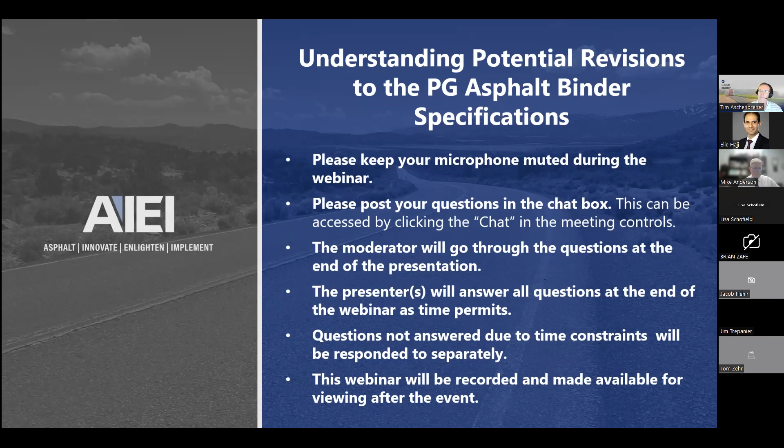Okay, thanks, Tim. Hopefully everybody can see the screen and can hear me okay. Yes, so I can see the screen and hear. Very good. Great.

As Tim mentioned, this presentation is about understanding potential revisions to the PG Asphalt Binder Specifications. This comes from some relatively recent research completed through the National Cooperative Highway Research Program, looking at binders, specifically intermediate temperature cracking and some issues with how that works within the binder specification, and what some recommended changes are. We'll talk a little bit about that. There's also a project that discusses binder aging and how that relates to mixture aging and what we see in the field. So we'll touch on that. I think we'll have some time in order to touch on those.

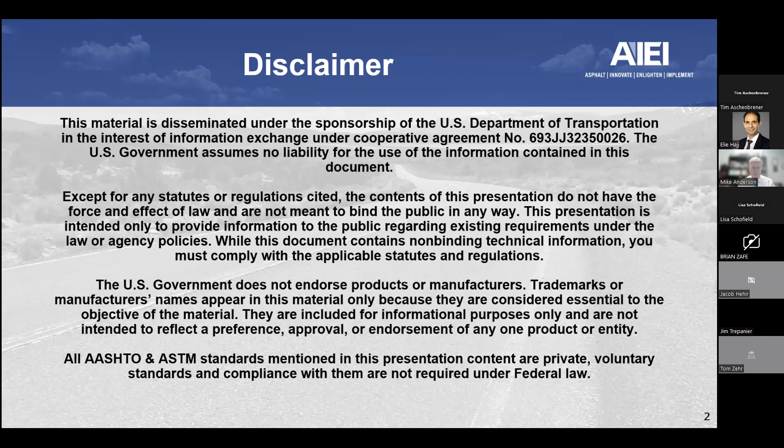Tim's gone through the introductory part. I will post the disclaimer. I'm not going to read all that for you, but just the standard disclaimers, that it's a cooperative agreement with Federal Highway Administration. The U.S. government doesn't endorse products or manufacturers. And if we're referencing AASHTO and ASTM standards, understand that those are private voluntary standards, and compliance with them is not required under federal law. I think the rest of it should be pretty straightforward, but it's there if you want to read through that.

First things first, really, as Tim mentioned, this is an implementation project. It was actually born of some work we did for the National Cooperative Highway Research Program that was also considered an implementation project. It goes by the number 20-44 PRIN 19, which is not a really convenient number, but the 20 series of numbers in NCHRP are kind of like special projects, and the PRIN 19 part means it started in 2019. So thanks to that project and the panel and the program officers for their input on that.

Also, really, because what we're doing is talking about implementation, this isn't research that we did, or that the University of Nevada, Reno did, or even our team members did, I don't think. So it's really just reporting on what those results were and trying to understand how they fit together with any potential changes we might be looking at in the PG binder specifications. We really couldn't do this without the research teams, is what I'm getting at. So thanks to those folks, the research teams for 959, 960, and 961. I'll talk a little bit about who those folks are. Thanks, of course, to this cooperative agreement that is looking at how we deploy these technologies. And last but not least, certainly in my case, thanks to our member companies of the Asphalt Institute who make it possible for me to do work like this.

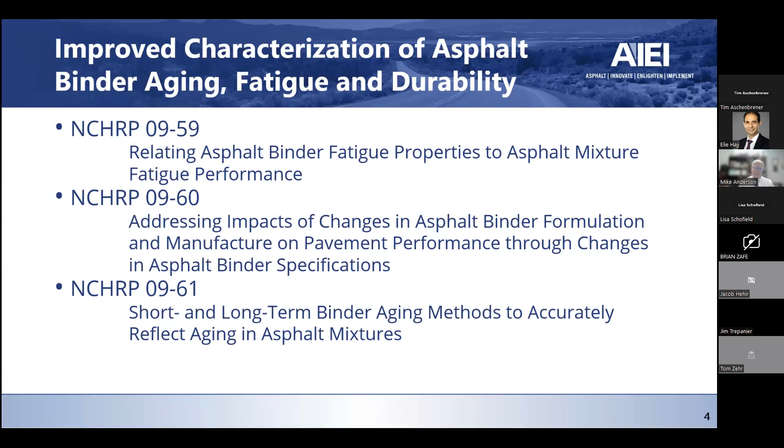Before we get into those projects, I want to step back briefly and cover some basics. This is important to set the stage for why we're doing some of these things, what they mean, and how they influence the performance we see on the road. Specifically, how are asphalt pavements affected by temperature and traffic loading? How does aging affect asphalt pavements? What distresses are we trying to minimize? And what do we want from an asphalt binder specification?

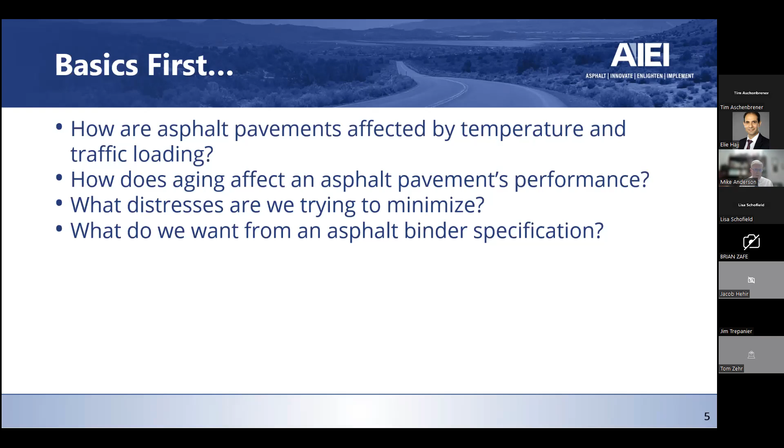These were all questions asked during the Strategic Highway Research Program as they were developing the PG Asphalt Binder Specification. And it's really the same questions we ask today: how do we establish a specification that addresses the distresses we want to look at for asphalt pavements? So I'll touch on some of this, and admittedly some of it is a little basic for some of you, but it's a good review.

First, in high temperature behavior - this slide was first developed by Bob McGennis back when we were doing training with the Federal Highway Administration after SHRP ended, about 1994, 1995. We had these classes and we talked about rutting and depressions in an asphalt mixture.

And we said, well, it depends on the asphalt binder, the mineral aggregate, and volumetric proportioning - you see that sum in parentheses. What that means is that each of those has some role to play in what happens with rutting in a pavement. We're talking about material rutting, not subgrade rutting or anything along those lines, which we don't control. From an asphalt mixture standpoint, the asphalt binder has a role to play, the aggregate has a role to play, and the volumetric proportioning has a role to play.

And we say that because it's important that you don't just rely on one of those factors to try and control your rutting. In other words, if I have a really good binder and I put it together with rounded aggregates and lots of natural sand, and I'm putting it out on a high traffic volume roadway, it's probably not going to perform all that well, even though I've got a really good binder. By the converse, if I've got really good aggregates and a really strong aggregate structure, but I use too soft of a binder, it may not perform very well.

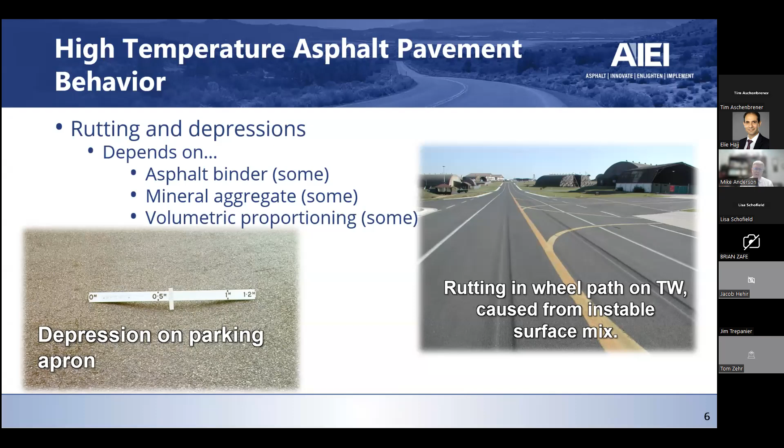And for volumetrics, what that basically means is what happens if I add too much asphalt to my mix? If I just pour asphalt into there, it's going to have bleeding and potentially rutting, regardless of the aggregate and the binder. So all those things kind of play a role. And that happens a lot with our distresses that we're interested in, which is important to think about as you're establishing a specification.

As far as low temperature cracking goes and low temperature asphalt pavement behavior, what we're interested in is cracking. That's a case where if the temperature of the mix is dropping, you get internal stresses that develop in the mix caused by this temperature drop. If your binder is too brittle or too stiff for that environment, then it can't relax the stress quickly enough and a crack develops. That happens as soon as the stresses exceed the strength overall, and you tend to get the transverse full-width type of cracking.

Now, in this kind of distress, it depends very much on the asphalt binder itself and not as much on the other factors - a little bit on volumetric proportioning, but not as much on mineral aggregate. The reason for that is the asphalt is the glue, and that's the part that's really temperature sensitive.

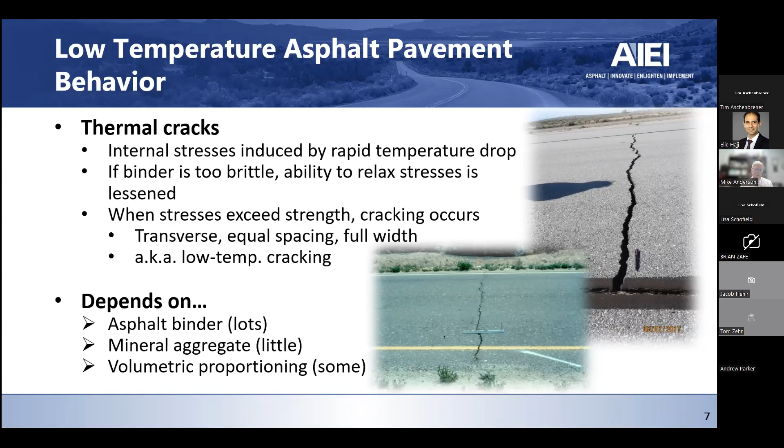When it changes temperature, that's the part that's shrinking. Even though you've got two rocks stuck together with glue in between them, as the temperature drops, the rocks don't change with temperature, but the glue does. And when it shrinks, that's where your stresses build up. So it really depends very much on the asphalt binder itself.

The other piece we look at is durability cracking and what happens as an asphalt binder ages. You've heard people talk about fatigue cracking. That's the type of cracking we get from loading, repeated loading. As cars and trucks pass over a pavement, it flexes, it relaxes.

The example I like to use when giving tours in our laboratory is that it's a lot like bending a paper clip. I don't know if you've ever done this, but I have. Just when you're bored, you've got a paper clip, you straighten it out, and you kind of bend it back and forth. Well, eventually it's going to break, but how quickly? It depends on how much I'm bending it back and forth.

If I'm just bending it a little bit back and forth, it's probably going to last for a while. If I'm making big movements, it's probably going to break relatively quickly. And it's going to depend upon the paper clip strength itself. If I've got a cheap paper clip, maybe it's going to break a little bit earlier than one that's a little bit better quality, made from better quality material. So those are what we look at for fatigue cracking.

With aging, what happens is an asphalt pavement oxidizes, and it's a hydrocarbon, and it's like any of the rest of us. We age and we oxidize and we get stiffer and we become more brittle. And that's what happens with a mixture as well. We tend to see that in random wandering cracking.

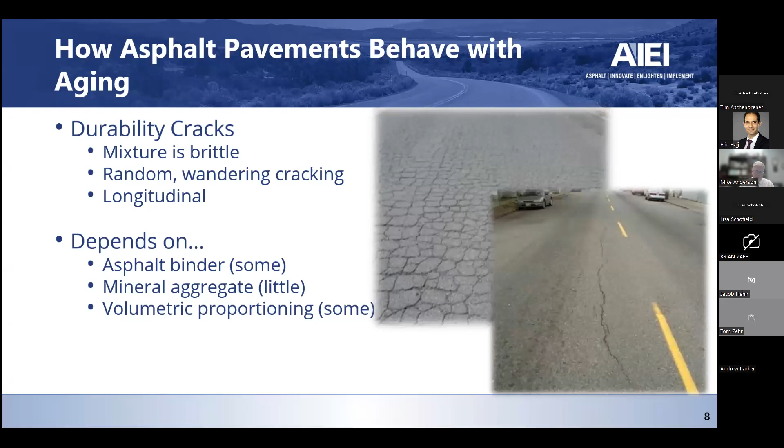Now, there's a model that Matt Witczak and Dr. Mirza put together. This was back in 1995. That was a global aging model, and this excerpt is from their paper from 1995. I don't think I gave the reference to Elie and Tim beforehand, so if you have an interest in that, I'll have to find that reference.

What they modeled was stiffness versus depth from the surface, and that's what this is an indication of here. Depth goes down on the y-axis, stiffness across on the x-axis. The thing to note is that if you are close to the surface, the stiffness is quite high. As you get further down, about 100 millimeters or 4 inches in, the modulus is about a quarter of what it is at the surface. So this is 20 gigapascals at the surface, and down here would be closer to maybe 5 or 6 gigapascals—a 3 to 5 times difference.

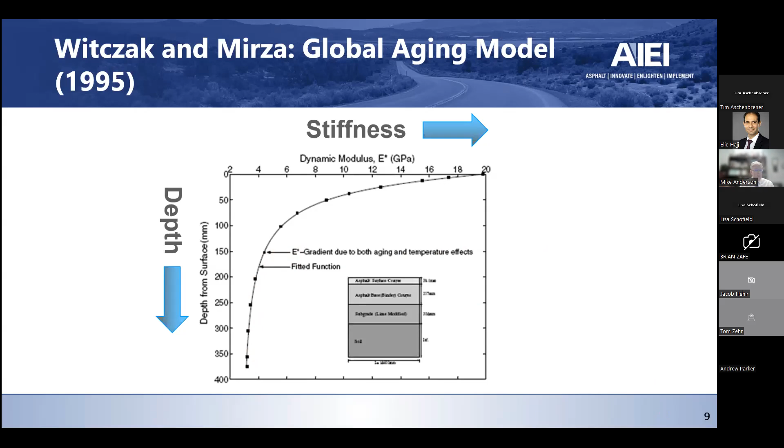So that tells us that a lot of the aging happens early, near the top of the pavement surface. That makes sense because as you build a pavement, you've got air voids in it, and air and water can get in through the top. That oxygen starts diffusing and doesn't get as deep into the pavement structure. As a matter of fact, at some point, as you can see from this graphic, it starts to really tail off where there's not much change at all. That's telling us the oxidation rate is changing quite a bit, and there's not as much free oxygen to age the material. But at the surface, it's quite extensive, or can be quite extensive.

So when SHRP was formed, this was the basis behind the PG specification.

They had to address the question: what do we want from an asphalt binder specification? There's a report out there, SHRP Report 90-007, part of their strategic planning document, that said it was based on the premise that asphalt pavement performance is significantly influenced by the properties of the asphalt binder. However, they did not say it was solely influenced by the properties of the asphalt binder.

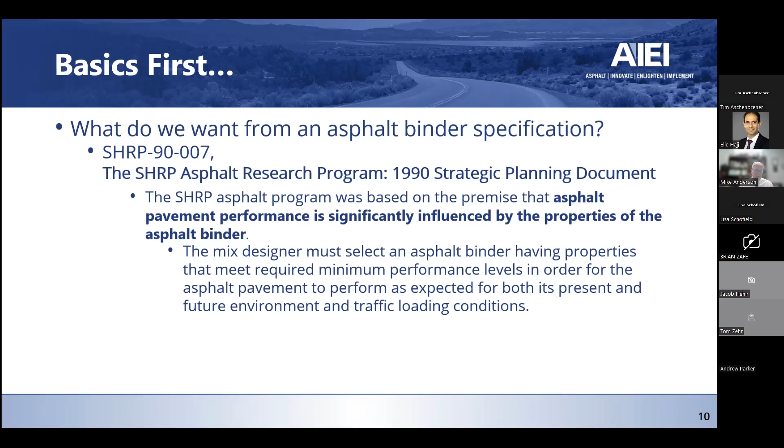Again, it goes back to the mineral aggregates you're using and the volumetric properties. But they're also saying that you need to select an asphalt binder that has properties that meet minimum performance levels for the traffic and the environment in which it's expected to perform, both now and in the future.

And they looked at several different distresses: permanent deformation or rutting, fatigue cracking, and they focused on thermal cracking. They did talk about moisture sensitivity, aging and adhesion, but they didn't really incorporate that within the specification. Aging was not really a distress, but it was seen as a factor in what would happen later with the distresses that you would see.

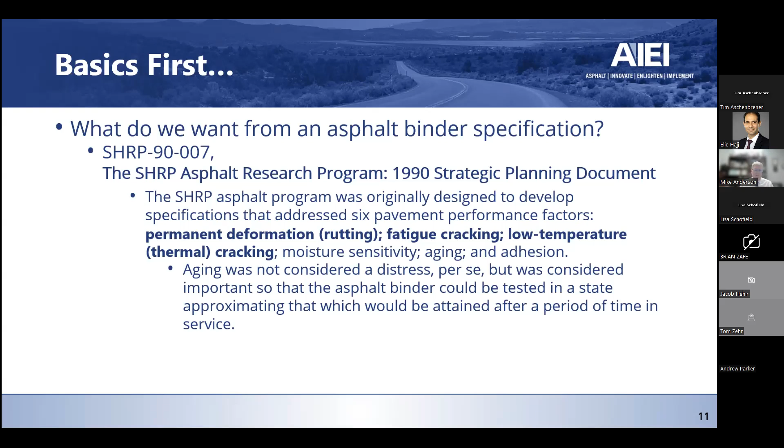So you wanted to be able to test the asphalt binder in a state that approximated what it would look like after a period of time in service. Again, what you're really looking for in a binder specification is for the asphalt binder to minimize its contribution to distress. We say minimize because, like I said, you're not going to completely take it away, even if you put in a great binder, if you don't do the other things well. So you want it to do its part, more or less. You want the binder to be able to hold up its end of the bargain, and in order to do that, you've got to have it meet certain minimum performance requirements.

The other factors that you see there, I list those because, as I mentioned earlier, they do contribute to distress. They can all contribute regardless of what the asphalt binder looks like.

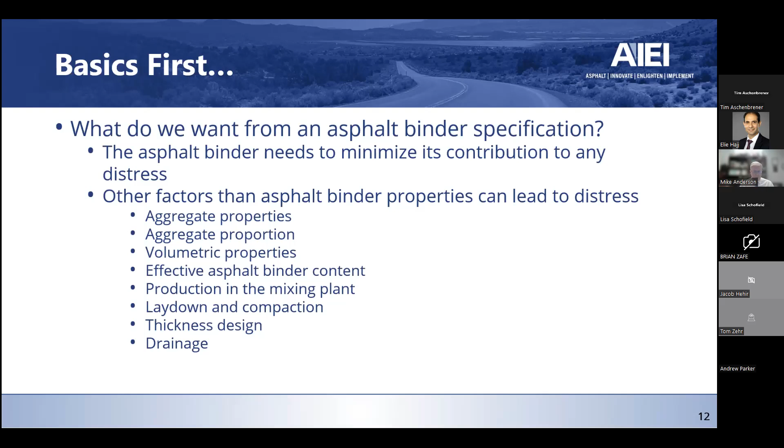On the high temperature side, we've addressed this. This was not part of the NCHRP projects that we were talking about, but rather came about earlier and has been in place. I think we had the master specification in place around 2010 to 2012. But it looked at the multiple stress creep recovery test, which was to address rutting and the binder's contribution to rutting.

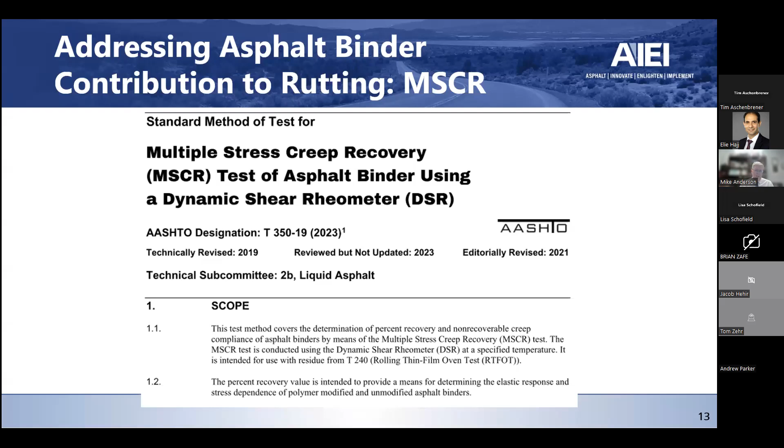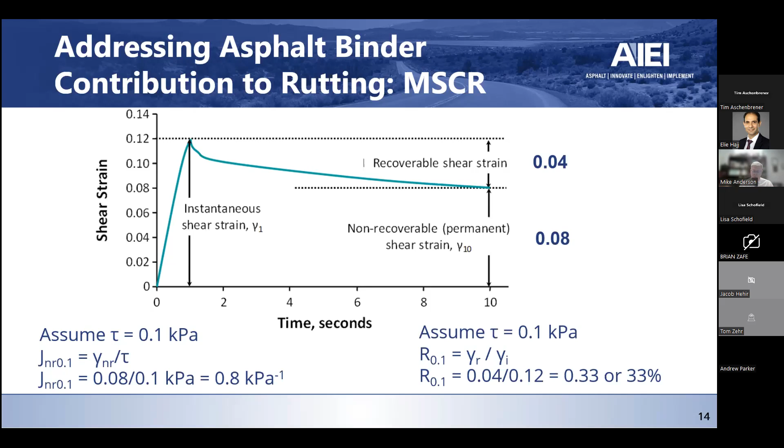You've probably seen the MSCR test. I'm not going to spend a lot of time on it, but basically it's a creep and recovery test, and you're looking at the non-recoverable shear strain. When you apply a load and then release it, how much of that deformation comes back? If it's elastic, if you have a lot of modified materials in it, or if the temperature is lower relative to where the binder is going to perform, you're going to have less non-recoverable, or permanent, shear strain than if the temperature is higher or you don't have as much elastic response from a modified material or similar.

So that's how we're addressing rutting within the binder specifications, and that's AASHTO M332 if you're interested. That's one of the reasons why, when I talk about PG binders, I say PG binder specifications, meaning this is applicable in this case to both M320 and AASHTO M332.

If you look at low temperature cracking and how it's addressed in mix design, this report was done a while back, NCHRP Report 673, from NCHRP Project 9-33. It talked about how thermal cracking performance of asphalt mixtures was most strongly influenced by the asphalt binder properties. So as long as you used an asphalt binder appropriate for the low temperature in which it was going to perform, the expectation is you would have adequate thermal cracking performance.

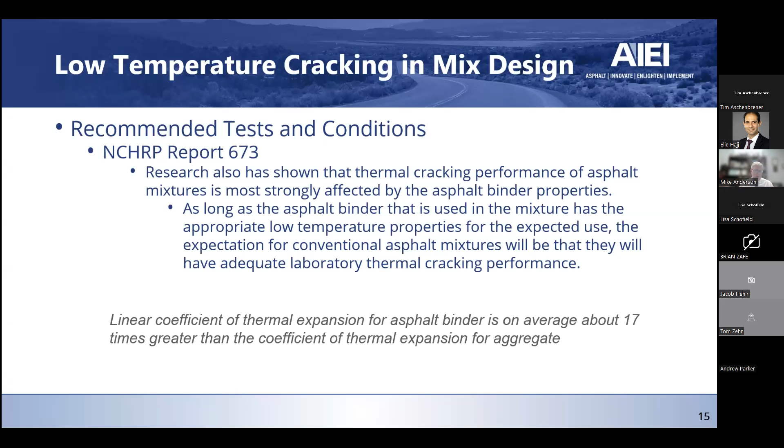We talked a little bit about this earlier, but that's just a note on the bottom about how different the coefficient of thermal expansion is for asphalt binder compared to aggregates. It's why we worry so much about the asphalt binder properties at low temperature, and we use the BBR in order to characterize low temperature behavior.

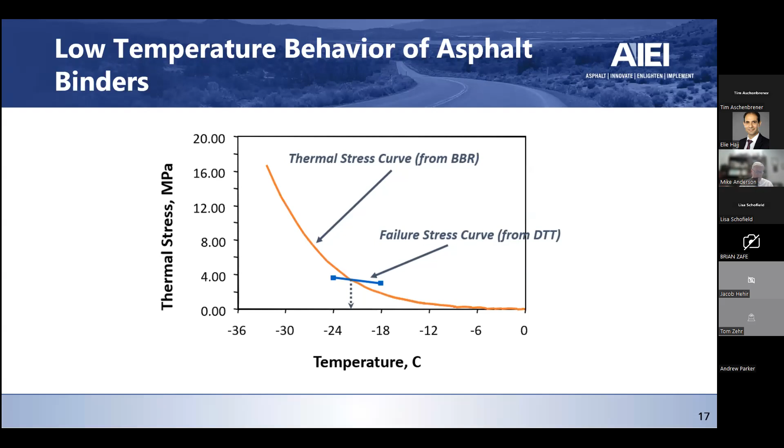I don't think people are doing this currently, but at one point you could use the direct tension test and develop a thermal stress curve to look at critical cracking temperature. Interestingly, this concept of critical cracking temperature is similar to something we'll talk about later with the asphalt binder cracking device, and what temperature that binder physically cracks. This was from modeling, that's a bit more from a test itself.

So let's look at the intermediate temperature parameters, because that's really what we're interested in for the most part with a couple of these projects.

If we look at aging, durability, and fatigue cracking, how is that addressed in the SHRP reports? This is SHRP report A-367, and it talks about how they came up with the parameter currently in use in M320 and M332, the G star times sine delta parameter. They talk about it being at the suggestion of researchers, and in light of fatigue performance in field trials such as Zaca Wigmore, the fatigue criterion was changed to reflect energy dissipated per load cycle. That dissipated energy is most appropriately calculated as G star times sine delta.

We'll talk a little bit more on that later.

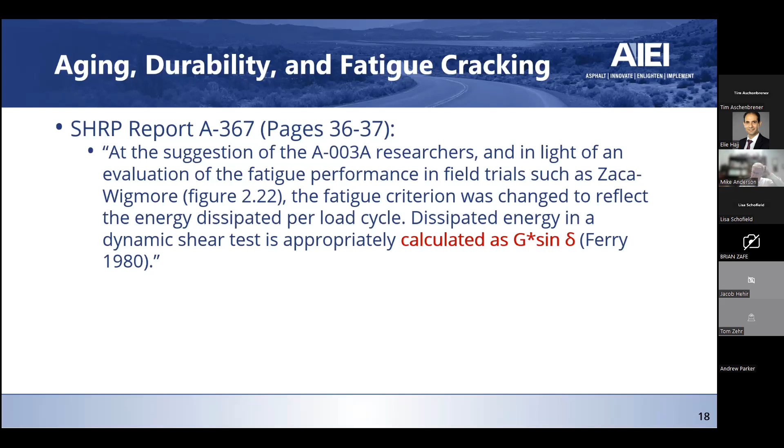If you look at the data from SHRP report A-388, which looked at laboratory fatigue performance of asphalt mixtures, and you plotted their data, they did what I think was called an 8x2 study, using 8 different core asphalt binders and 2 different aggregates. They also used 2 different air void levels and 2 different strain levels, so a variety of conditions.

What you can see is that mix fatigue life in the laboratory, generally speaking, responded to that G star times sine delta parameter. In other words, fatigue life is going to go down, you're going to have earlier cracking as the material gets harder, and that's what these curves are telling us. They're not great, the R-squared values are 0.57, 0.81, depending on the strain level you're looking at and what the responses are.

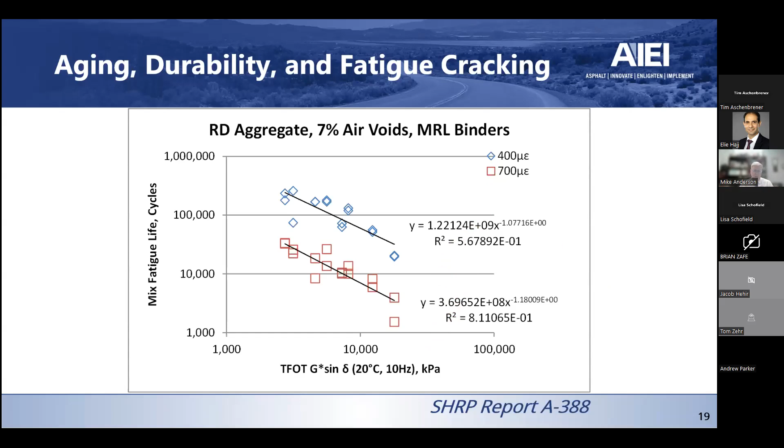There's a lot of variability that occurs in mix testing, particularly fatigue tests, because it's a cracking test. Some of that variability we expect to see, but in general they felt this justified what we were seeing behind using G star times sine delta.

They further talked about seeing something more than just a simple hardness shift during oxidative aging. It changes time temperature dependency as well, reflected in the shape of the master curve and how that changes. It further notes that the changes that occur are complicated. In general, strain to failure and deformation rate decreases with aging. The asphalt becomes more brittle and exhibits less strain tolerance with aging. That's all out of the SHRP reports.

So they recognized during SHRP that this sort of change happened. One thing we've talked about in our lab during training is that for newer technicians, it's easy to confuse stiffness and brittleness. Stiffness is just how hard the material is. Brittle is how likely it is to crack, or how it responds to strain and what kind of strain tolerance it has. So there's a difference between those two. Both things happen, not just stiffness increasing as it ages, brittleness also increases.

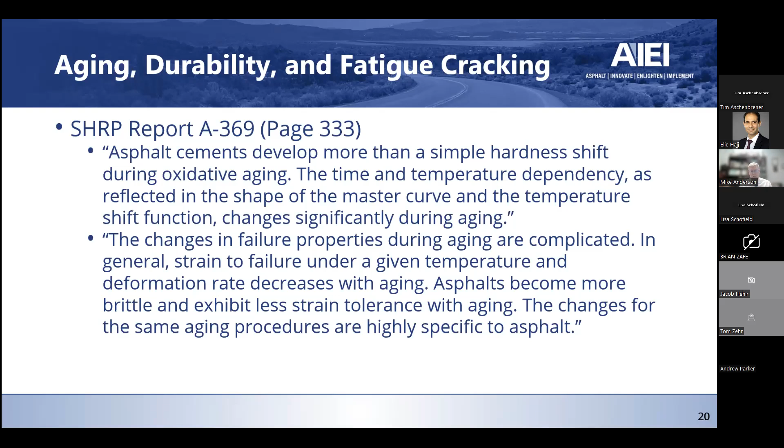So let's talk about the research projects, 9-59 first, and then we'll touch on some others.

This research project was done mainly by Don Christensen with Advanced Asphalt Technologies, and NCAT. You can see the objectives up there. Basically, what they wanted to find was a practical, implementable binder test that would be a significant indicator of mixture fatigue properties. You see the NCHRP report listed, I believe it was in the reference list, so you can access that. That's a free PDF download if you're interested.

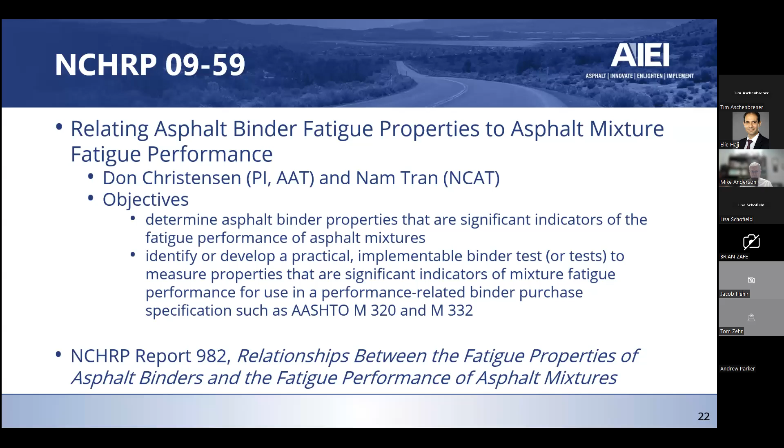Some of the key findings, I'm not going to read all this because it basically says what I've said before, fatigue life is going to depend on a lot of different things. But the overall focus is how does the binder failure strain contribute and what happens to the fatigue performance. If you boil that down, as the binder becomes stiffer, as G star increases, the fatigue life or resistance to fatigue damage decreases. And as the binder becomes more brittle, as the phase angle decreases, in other words it starts behaving more like an elastic solid than a viscous liquid, then the resistance to fatigue damage also decreases. So both of those things happen, and that happens with aging.

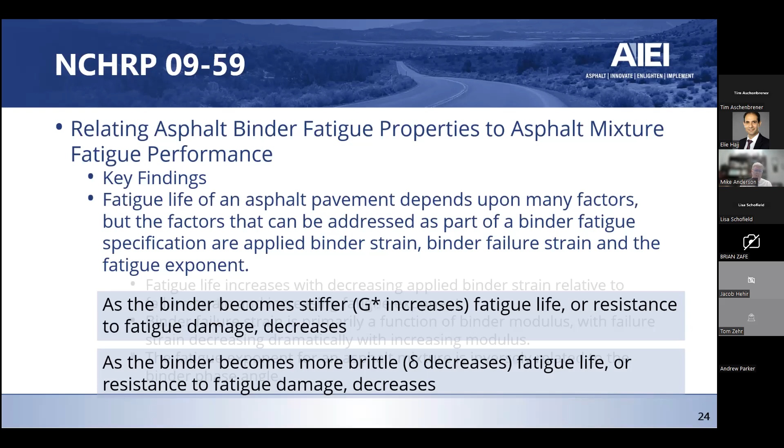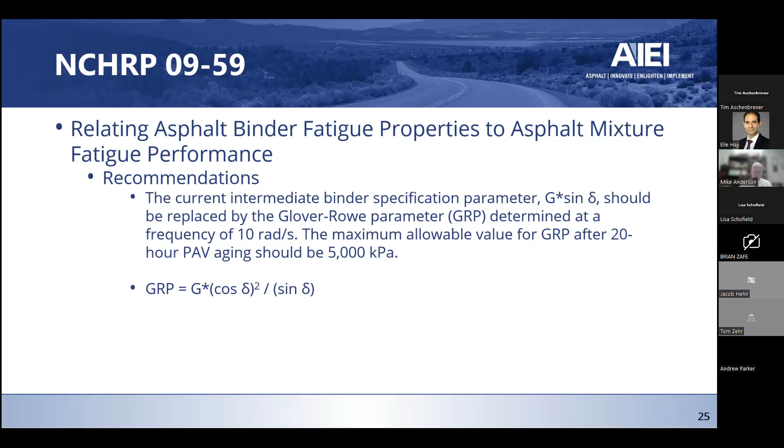It's hard to get your head wrapped around what that means basically. But in essence, delta plays a bigger role in determining what that value is going to be than just what we see with G star times sine delta. I'll explain in the next slide what I mean by that.

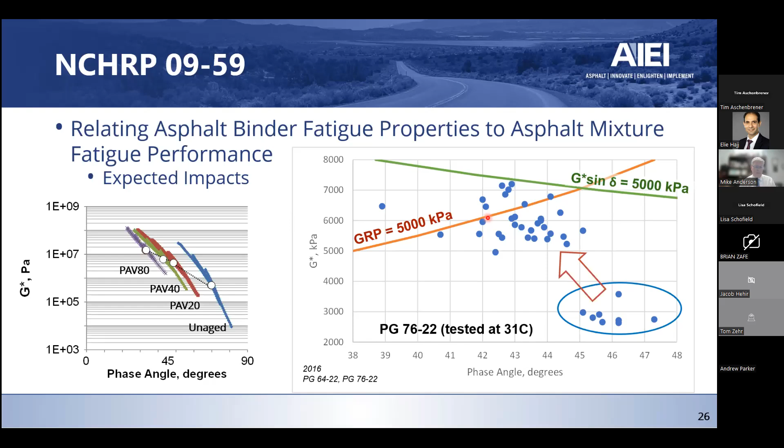The other thing you see is that the Glover-Rowe parameter provides, I would say, a better defining line for our specification. As I move in this direction, I'm approaching this limit obliquely - as phase angle goes down, oddly enough, this line kind of goes up. The Glover-Rowe creates more of an angle where you're going to cross it right at a perpendicular. So rationally, from a specification standpoint, approaching a limit and passing it, it makes a little more sense potentially to do something like that.

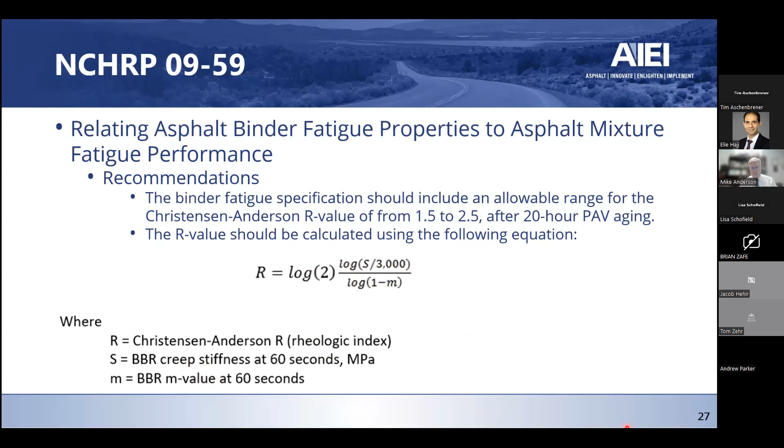The other thing they looked at in the 09-59 research was R value. R value just defines for you the shape of the master curve, and they talked about that in the SHRP reports and how that changes with aging. The calculation that Don uses, which was from work he did with the SHRP program, the Penn State research team, was to calculate R value using BBR data. The R calculation uses the log of stiffness divided by 3,000 and the log of 1 minus the M value. So basically, you're taking the BBR creep stiffness at 60 seconds, the M value at 60 seconds, plugging that in for S and M, and calculating R. So from that standpoint, a pretty straightforward calculation.

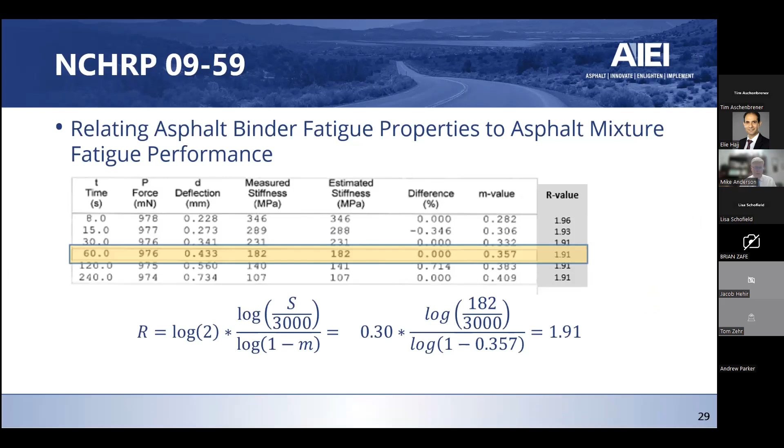Now, this is how you would use the BBR data. You'd probably just need eventually to get a new printout from Cannon or ATS — in this case, this is a Cannon printout, or any other manufacturer out there — and you would just basically add a column that would calculate R value for you based on that BBR stiffness and M value. The equation is shown here, and you can get this parameter, this value that's there.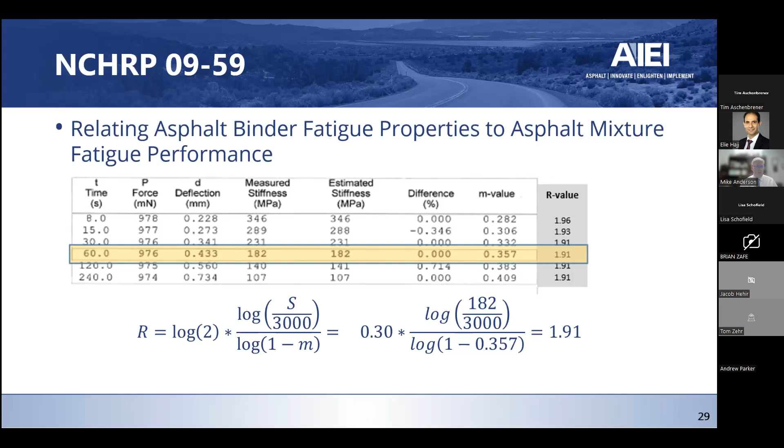There's some caveats to that. First of all, what you're doing here, using this 3,000 number, is assuming a glassy modulus. And that's an assumption that may or may not be valid — it depends on the asphalt binders themselves. There's a lot of rheologists that'll tell you it's not a fixed number, it's not so easy to say it's 3,000 in bending. If you're wondering why it's 3,000 and not what we typically think of as 1,000 megapascals or 1 gigapascal, it's because we think 1 gigapascal is for shear, and bending is about 3 times that number. So that glassy modulus may or may not be applicable. It gives us an index, but it's based on some values where you have to make assumptions in order to use it, and that is a bit of a negative.

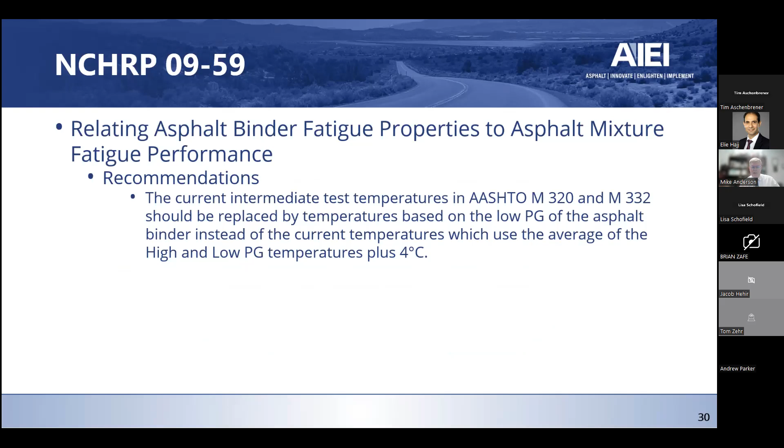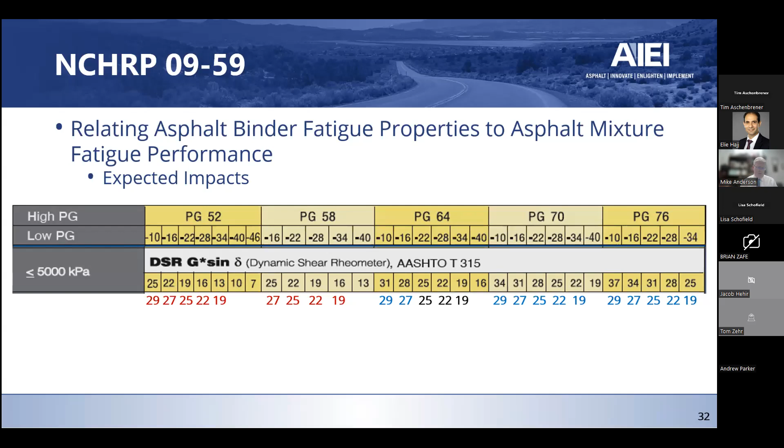The other thing they put together was a recommended change in temperatures, and you can see what these temperatures look like here. Basically, they're saying instead of basing it on the average plus 4 degrees, it ought to be based on the low PG. So this is what your table looks like, recommended based just on the low PG grade. For some binders, it's not going to make a change; for others, it's going to make a bit more of a change. Generally speaking, if you're a 64 grade and you're a 64 minus 22 or a 64 minus 28, it's about the same intermediate temperature, so no changes there. If you're higher than a 64 grade, you're probably going to test at colder temperatures. If you're lower than a 64 grade, you're probably going to test at a little bit warmer temperatures. And in some cases, those impacts can be pretty big.

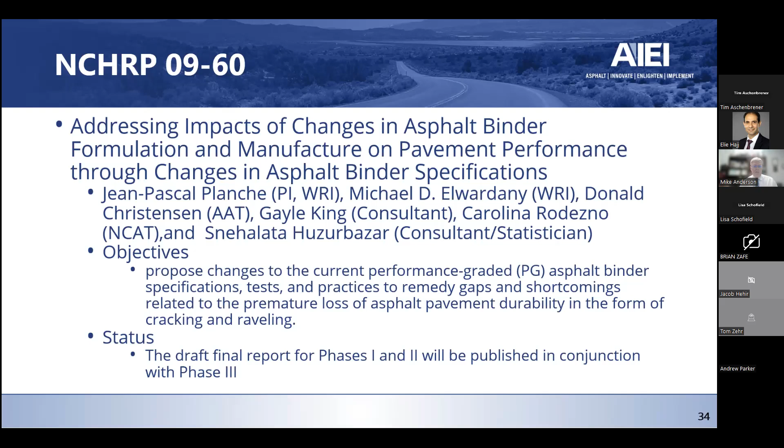Let's talk about 960 and the work they did — I'll summarize some of this with 959 a little bit later. So 960, big long title, was done with J.P. Planche at Western Research Institute, Michael Elwardany, Don Christensen was involved, Gayle King, Carolina Rodezno with NCAT, and then a consultant statistician as well. Basically, what this project was intended to do was recognize there might be some gaps and shortcomings in the specification particularly related to durability in the form of cracking and raveling, and how do we address those in the specifications. There is not a published final report yet — the project is into a phase 3, and there is a draft final report that will be published in conjunction with the phase 3 findings.

What their work so far has identified is that they're recommending adding a parameter like delta TC to both AASHTO M320 and M332 that relates to the relaxation properties of unmodified binders, and generally relates to the colloidal structure of the asphalt binder. I had to slow down because I always struggle with colloidal — that takes me a little bit.

They also note that the use of delta TC alone can underestimate the performance of modified materials in some complex binders. Part of the reason is you're using a rheological parameter, a small stress, small strain parameter, which is what delta TC is telling you, and you're trying to see how that relates to cracking, which is at a higher strain level. Polymers have a different strain tolerance, and polymer modified binders might have a different strain tolerance than an unmodified asphalt binder, so we want to be able to capture that somehow.

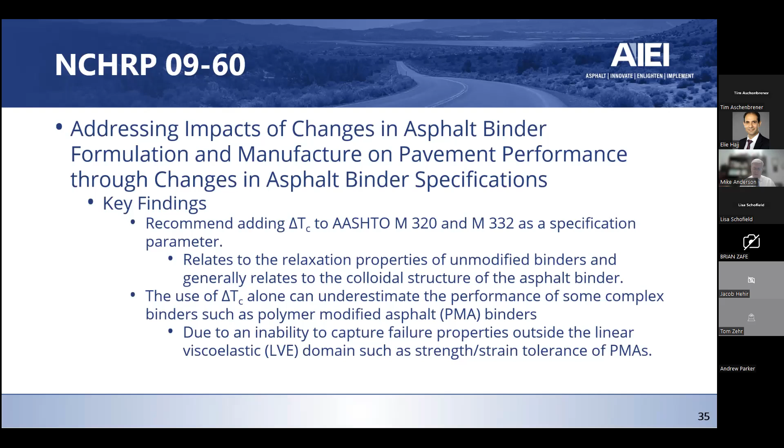What they further recommended was the use of the asphalt binder cracking device to help capture that strain tolerance of the materials. That's given in AASHTO T387.

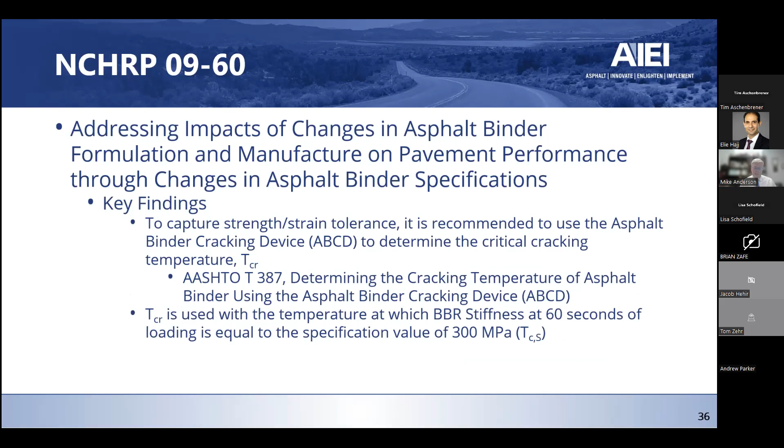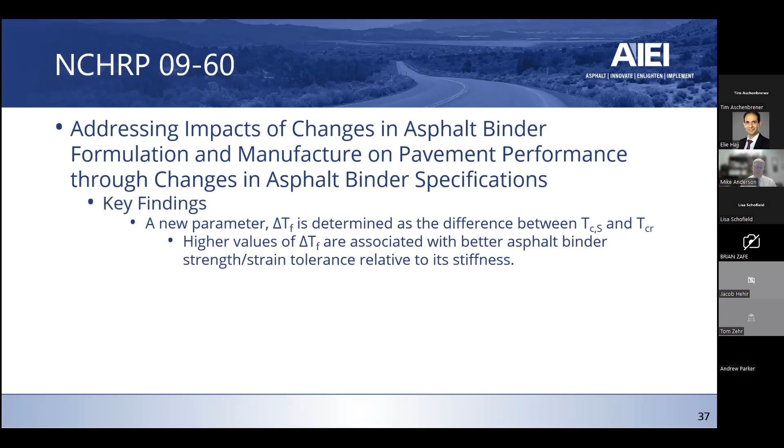It uses the critical temperature at which the BBR stiffness at 60 seconds is equal to the specification value. We call that TCS. Then it uses the critical cracking temperature from the ABCD to create this new parameter called delta TF. Basically, that's looking at the spread between what a rheological parameter tells us it ought to look like from a stress-strain standpoint, versus what it actually has in cracking from an actual cracking test, and what that difference in strain tolerance is. Generally speaking, if you get a broader range in delta TF, you've got more strain tolerance relative to its stiffness. So that's what that is telling us.

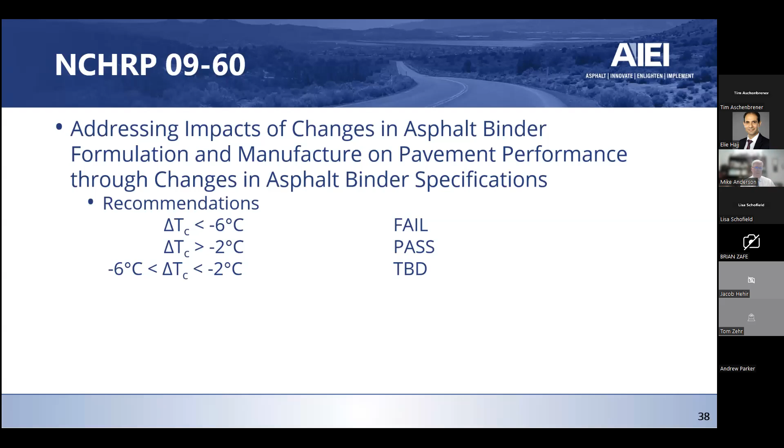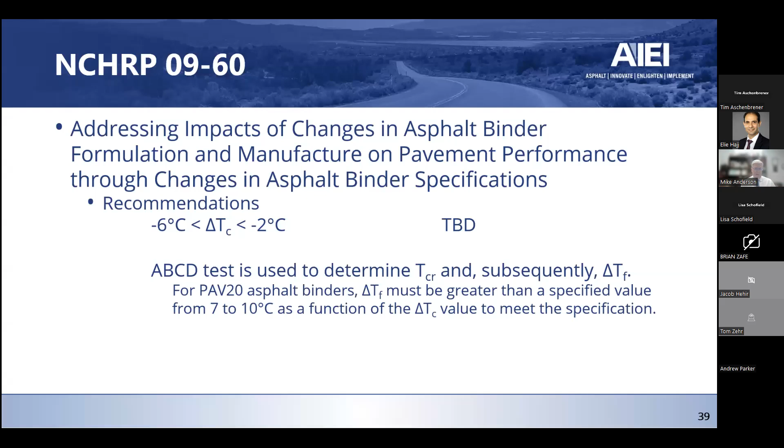Their recommended parameters, and this is still going through some vetting, is anything below -6 on delta TC is a fail. This is all at PAV 20. Anything above -2 delta TC is an automatic pass. In between those two, you've got to do some more work to see if that relaxation is going to be a problem, or if the binder will have enough strain tolerance. What that means is that's where you go to the ABCD, the asphalt binder cracking device. Basically, what they're looking for there is a certain range of values that says it's good enough that it can withstand that apparent poor relaxation, if you will.

The way we do that with the ABCD, given in AASHTO T387, is that it's heated, poured into a silicone mold that's got a strain gauge. We'll see a picture of this in just a minute. It's cooled at a constant rate, and then the sample cracks when a jump in the strain occurs, and that's where the critical cracking temperature is.

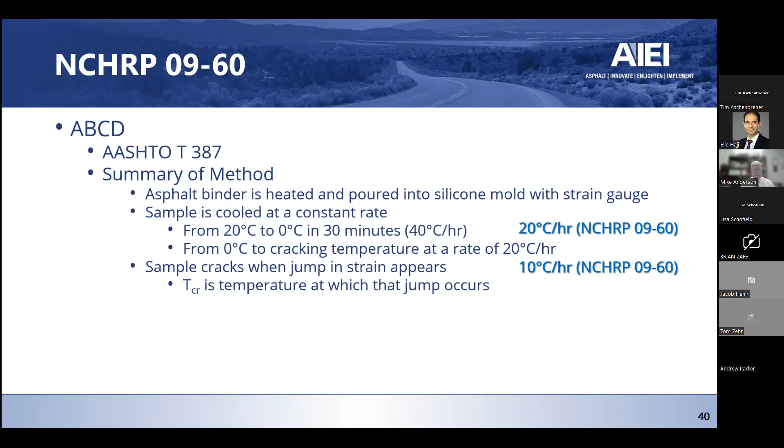You see the notes there about the cooling rate. In NCHRP 9-60, in their first phase and second phase, they were looking at a slightly different cooling rate than what is given in T387. I think they might be going back just to T387. So don't hold on too tightly to the 20 and 10 versus 40 and 20 degrees C per hour shown here - when the recommendations are all said and done, it might very well still be what T387 says.

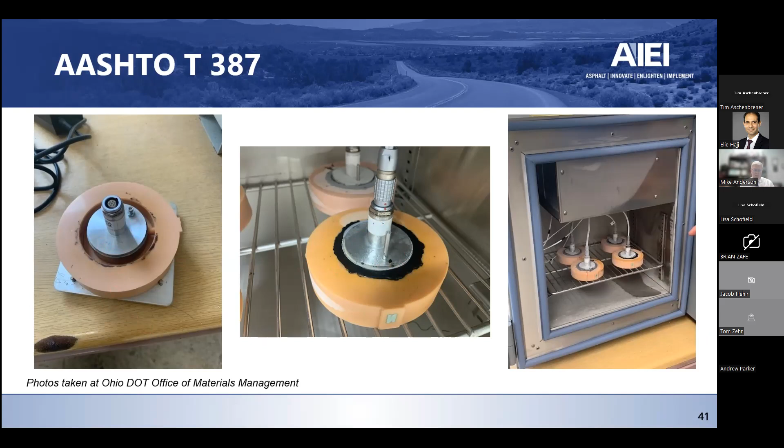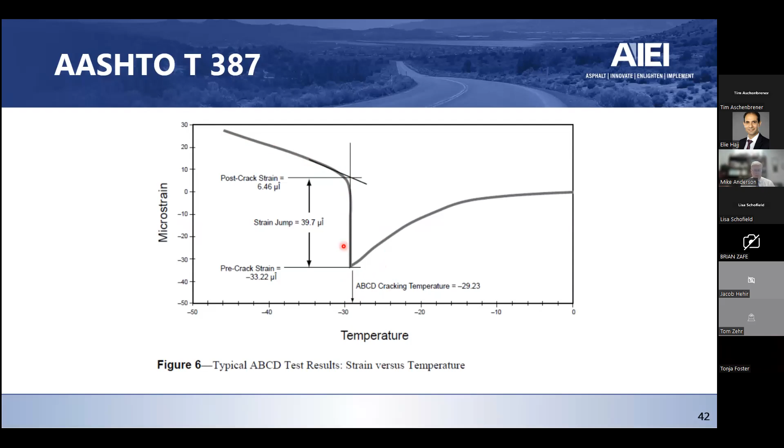So we've got to think of this starting here on the right-hand side. As it gets cooled down, it reaches a point where the crack occurs. That's when you see this jump in strain happen, and then you get this post-crack strain that occurs overall. That defines for us what that cracking temperature is, where that jump in strain occurs. It's that critical cracking temperature that we use with the TCS we get from the bending beam rheometer in order to calculate this delta TF.

The way this is right now, courtesy of the 9-60 folks and Western Research, is that anything in this region - again, this is -2 and higher - this is region 1, everything's okay. Anything in region 2, which is -6 and lower, is going to fail. In between -2 and -6, there is a minimum delta TF required, and that changes - it's not just a minimum, it gets a little more harsh as you get lower and lower on that delta TF criteria, such that if you're above that in region 3, you pass, below that in region 4, you fail.

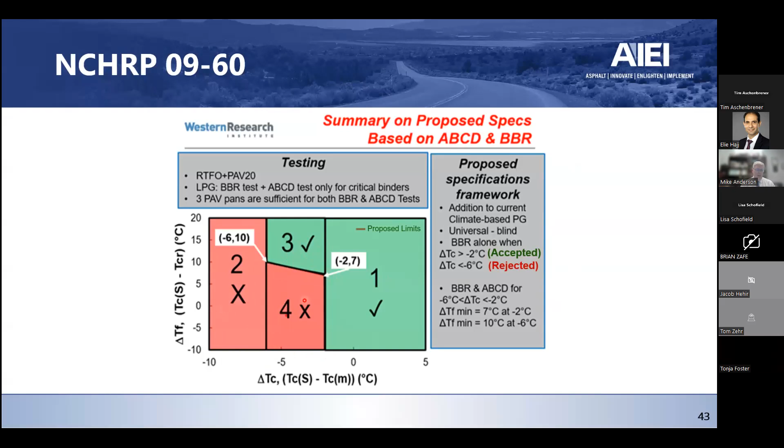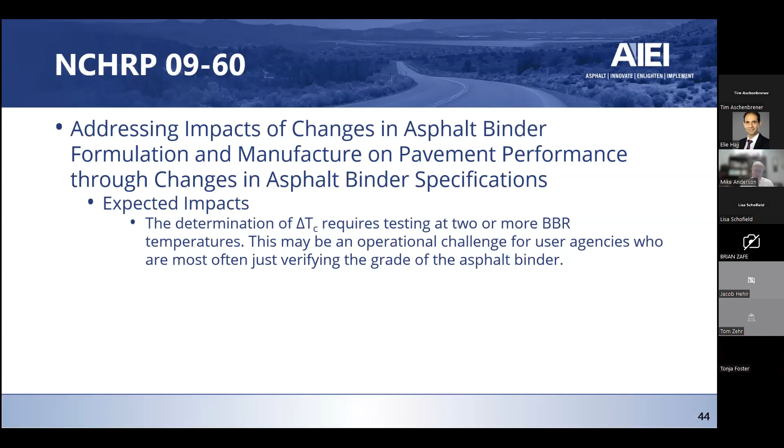So there are some challenges involved with this and what the impacts are. One of the challenges with delta Tc is it requires testing at 2 or sometimes 3 BBR temperatures. This can be an operational challenge, particularly for user agencies that are used to just verifying the asphalt binder grade. Now, instead of just running a -12 for a 64-22, now you've got to run at -12 and -18, and potentially, depending on what the delta Tc is, maybe at -24 or maybe at -6. So you could be running at multiple temperatures, and that can add to the challenge.

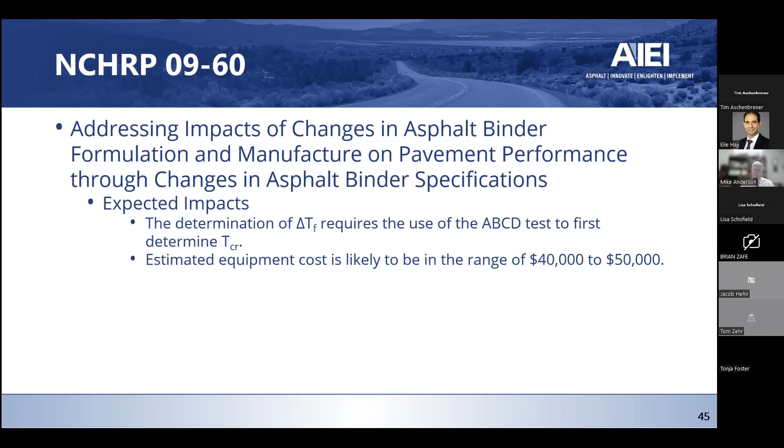This is an older slide. I don't know that the equipment cost is necessarily accurate anymore, but one of the things we found early on is that if you're going to classify those materials that are in between -2 and -6, you need the ABCD device, and that's a new piece of equipment for a lot of people. 40 to 50,000 -- it's probably in the range of what you'd spend for other binder equipment, but it's a new piece of equipment, so you have to account for that certainly. And it's not, as I always tell people, it's not just a new piece of equipment. It's a new piece of equipment I've got to maintain and calibrate and make sure is in my quality management system, have students that are trained on it, etc.

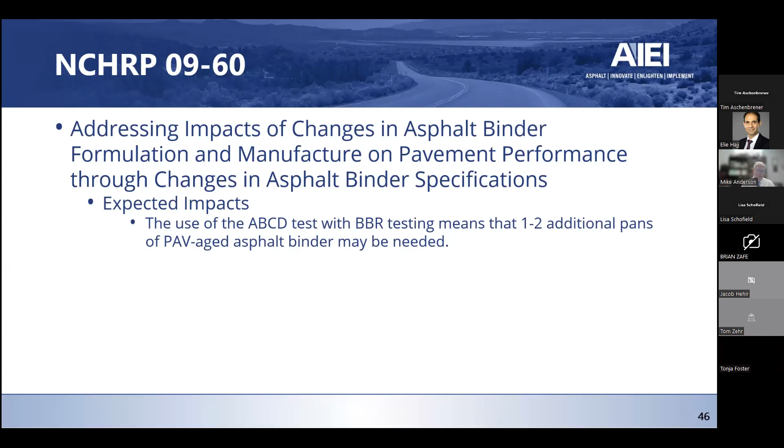The other thing is you might need some additional PAV pans. If you're going to pour up those molds that you saw there, I think it's about 14 grams required per ABCD ring that you pour up, give or take. So you think about that -- you're going to pour up 4 of those, that puts you at 56 grams of material. So you need 1+ pan of PAV just to have enough material to do the ABCD testing. So it's going to mean some additional aging that's going to be there as well.

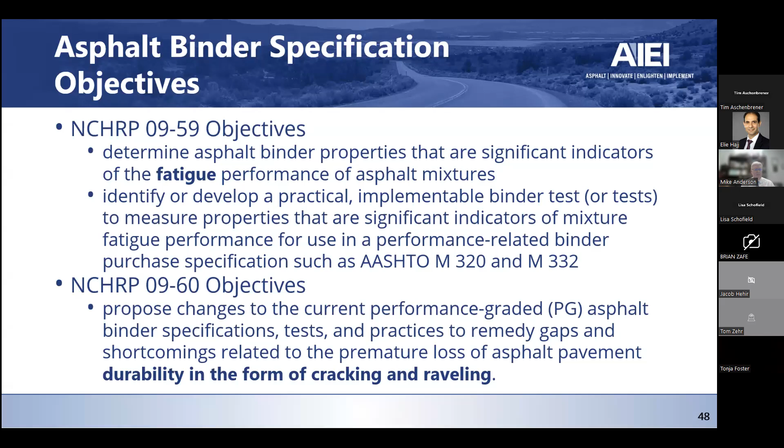So how do we relate those two? They seem to be somewhat related. 959 was looking at fatigue cracking. 960 was looking at durability cracking. What's the relationship between those? Because those are both intermediate temperature. We want to look at what the specification objectives were for both of those, what they were trying to achieve within the research -- again, fatigue versus durability in the form of raveling and cracking.

And to do that, we go back to the SHRP work and what they reported on. And the reference, if you remember correctly, we talked about the Zaca-Wigmore test road, asphalt test road. This is reported in a paper from 1969. So 50+ years ago, 60, or not quite 60 years ago, but 55 years ago, something along those lines -- my quick math isn't working for me. But it was reported by Zube and Skog in this 1969 paper. This was a test road on US 101 in Santa Barbara County, California. They had 10 asphalt binders. They were 200 to 300 pen material.

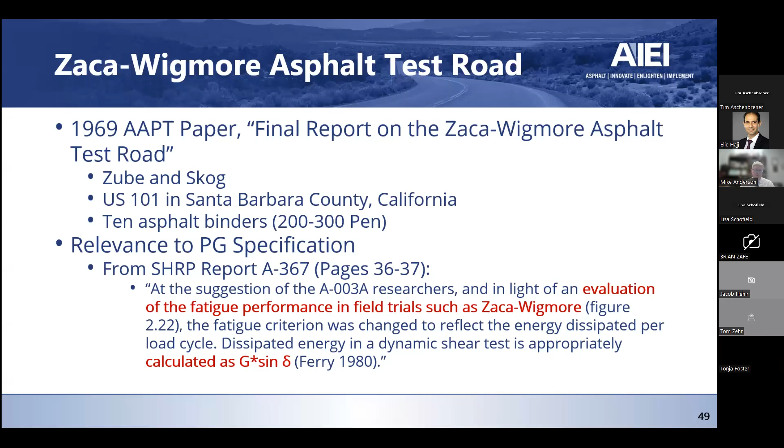But what was interesting about this test road, the 10 different binders they looked at, and this climate, which is Southern California -- so thermal cracking is not really what you're worried about so much. But they found fatigue cracking, and they said that was the most prevalent on the project, and it was related to the stiffness of the asphalt binder, the recovered binder consistency. But they also found a secondary distress that was most prevalent in the passing lane, the lane that was less traveled and had less trafficking, and that was block cracking with raveling. They found that was related to a gain in shear susceptibility during weathering, or a drop in ductility during service life. In other words, as the material became more brittle, they saw more of this block cracking with raveling.

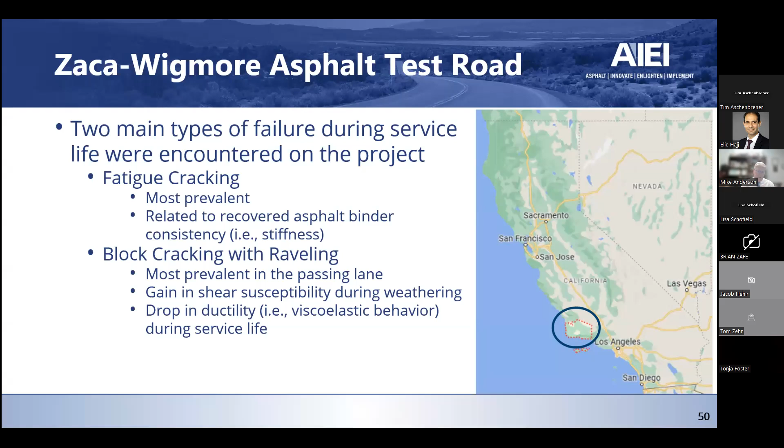So there actually were two distresses on that road. The SHRP research mainly focused on fatigue cracking, and perhaps thought that what they were hoping to capture with G-star sine delta would also capture the block cracking that they saw. So the specification that we've got now, G-star times sine delta, you can reference that back.

May not be perfect as a parameter, but there is some referenceable information that suggests it is related to fatigue cracking. But there's not really anything that we had for durability or block cracking.

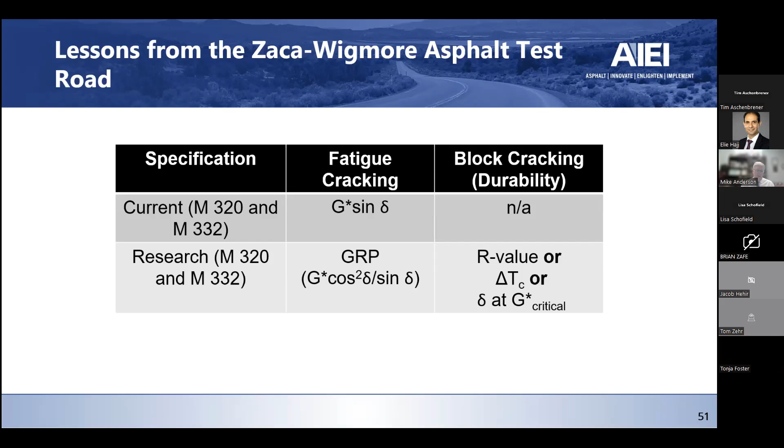So the research that's come out now is suggesting Glover-Rowe instead of G-star sine delta, and a new parameter for durability. That's either R value, from the 959 research, or delta TC, from the 960 research, or another parameter that we've looked at, along with others involved in this, Jeff Rowe, and I know ExxonMobil Imperial has been working this issue as well, where they're looking at phase angle at a critical G-star or at a certain G-star value. They're all interrelated, and we'll see that here in just a minute.

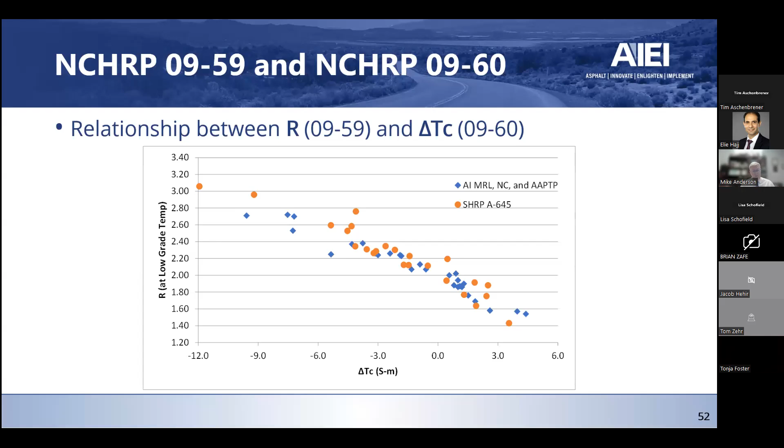This is just what it looks like if you put them all together and you just said, what's the R-square look like? In general, that's not too bad to look at that for all those different data sets that are there. You get a little bit of tail off and you could argue whether a linear fit is the right fit, but overall, it's not too bad.

If you look at the requirements that they put into 960 based on that data, it would say that your absolute failure top end is 2.6 for R value. That's at a -6 delta TC. And basically anything at or below a 2.2 on R value would be acceptable.

That yellow is kind of the middle area. If you look at the 959 research, they say the absolute top end is 2.5, which is actually about a delta TC of -5. And their other end, which they aren't as worried about, is a 1.5. That's a delta TC of about +4, which you'll see occasionally with some materials, but most materials are m-value controlled, and so they're more negative than they are positive.

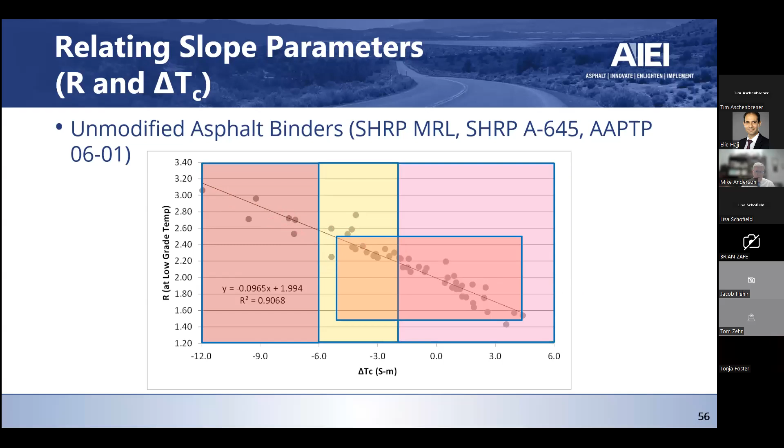So overlaying those two, that's kind of the region there. That little rectangle that you see here is kind of the region of overlap of performance where we would expect those two specifications, those two research projects and their recommendations, to recommend that those materials are acceptable. If you start getting out here, these would be levels that the 959 might consider unacceptable, but 960 would say maybe is okay. That one, the 959 says is good, 960 says maybe. These, they both say are not very good. So there is some overlap between these data.

One of the questions is, how does this work with modified materials? This is work from the 9-10 research that was led by Hussein Bahia and is reported in NCHRP report 459. You can see there, what I did again was I did some data mining back from the data that we had. 12 different modification materials and processes that you see there, 14 different grades. It was quite extensive research that Hussein led on this effort, including some oxidized materials and polyethylene and ethylene vinyl acetate and SBR, SBS, that sort of thing.

And they still get a pretty good relationship between R value and delta TC. So even though these are rheological parameters, they do have some relationship still between those two parameters. And again, I want to be clear, R value is calculated from BBR data. Delta TC is calculated from BBR data. So we expect there to be a good relationship. This wasn't a surprise necessarily, but we wanted to show how they were related, not that they were related.

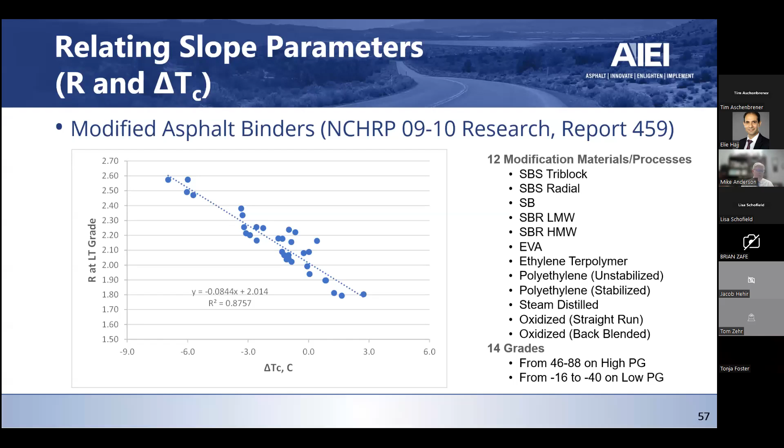The other part is to look at delta TC versus both R value and versus this phase angle. So the phase angle is, we chose phase angle at a G star of 10 megapascals. That tends to be where people are coalescing around that kind of idea.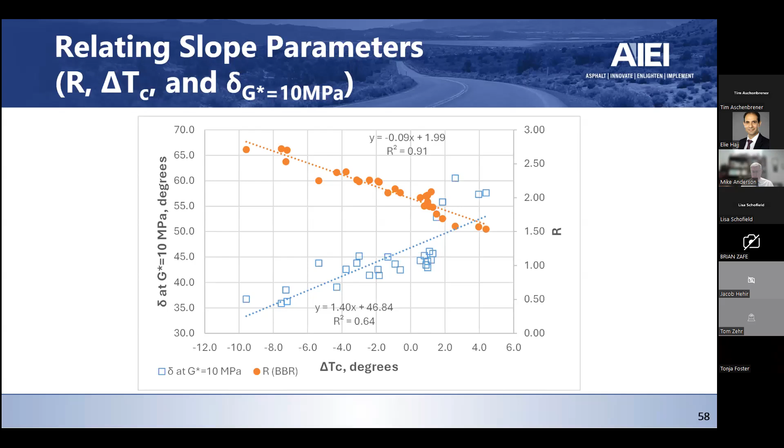So let me touch on 961 briefly. I know we're getting a little shorter on time, so I'll try to go through this and then we'll pick it up from there on what all this means. This is looking at aging. This report is reported in 967. Work done by Ramon Bonaquist with Advanced Asphalt Technologies, with Jeramie Adams at Western Research and Dave Anderson as a consultant.

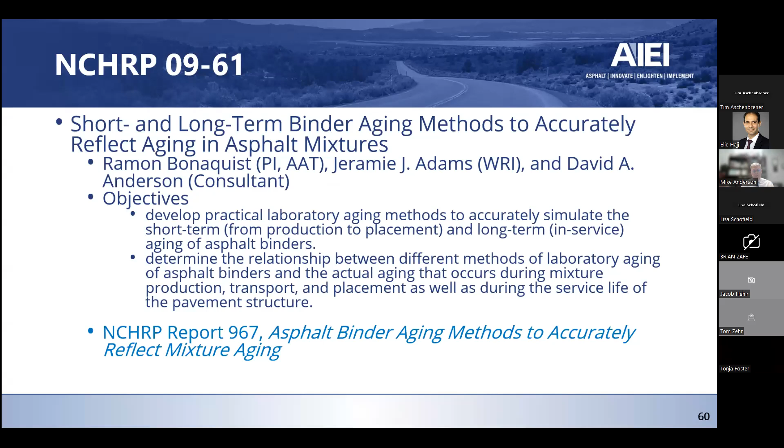Basically they were looking at short-term and long-term aging of binders, the procedures we use, and how they correlate with what we see in the mixture field. The outcome of this was that they found that the RTFO we've been using for some time, basically since SHRP and the PG system came about, is really about as appropriate as we can get it. It reasonably correlates with the short-term aging we see during production of asphalt mixtures. There's some challenges as you're using modified materials. We see some rolling out of bottles in some cases, and some of that is technique driven. So there's some guidance in there, but generally speaking, what they said was the RTFO seems to be doing a pretty good job. Now they didn't focus on the elevation changes.

That was a different project, and that made its way into T240. So if we look at T240 now, you'll see that you're going to change the time based on elevation changes. That comes from a different research project, but it's not from this one where they talked about these changes.

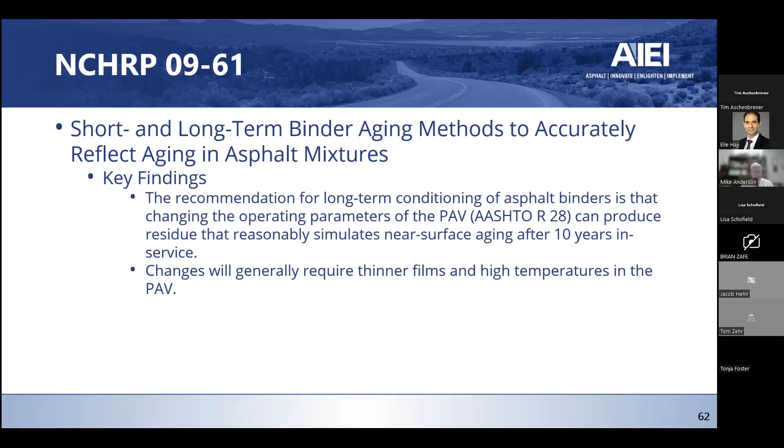Oops, I went backwards, sorry. What they found from the PAV is that you can change the operating parameters of the PAV to reasonably simulate near surface aging after 10 years in service. But to do that, it's going to require thinner films and higher temperatures potentially. So what they did in their research was they looked at how do you model that. That was 20-hour aging, 2.1 megapascals, which is the standard pressure, but only using 12.5 grams instead of 50 grams. So what you've done in essence is you've cut the film thickness in that pan from 3.2 millimeters down to 0.8 millimeters. It's a much thinner film and it allows oxygen to diffuse quicker into the asphalt film itself.

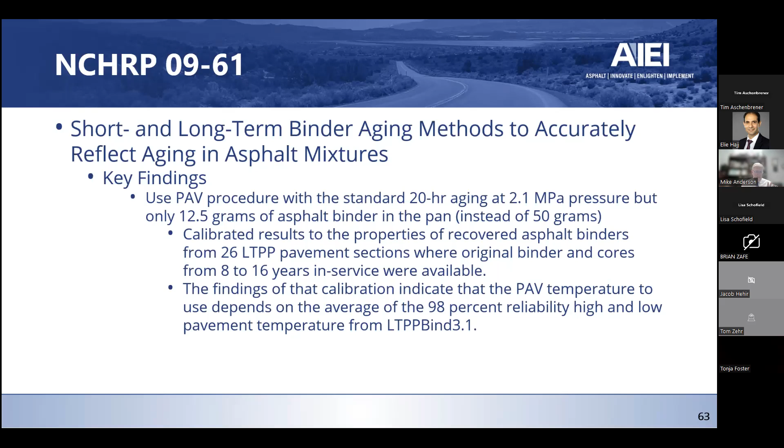They did calibrate the results to the properties of recovered binders from 26 LTPP sections. And what they found was they had cores between 8 and 16 years of service. They were able to calibrate that to get this as far as what the PAV temperature would look like and what the aging would look like.

So what they were careful to say is that if you're using RTFO, you really don't have to do any changes. If you're sticking with a 20-hour PAV, you really don't have to do any changes. But if you want a longer simulation, you could do the 40-hour PAV, but instead of doing the standard 40-hour PAV with 50 grams of asphalt binder in it, you use a 20-hour PAV with 12.5 grams of asphalt binder in it and slightly different temperatures.

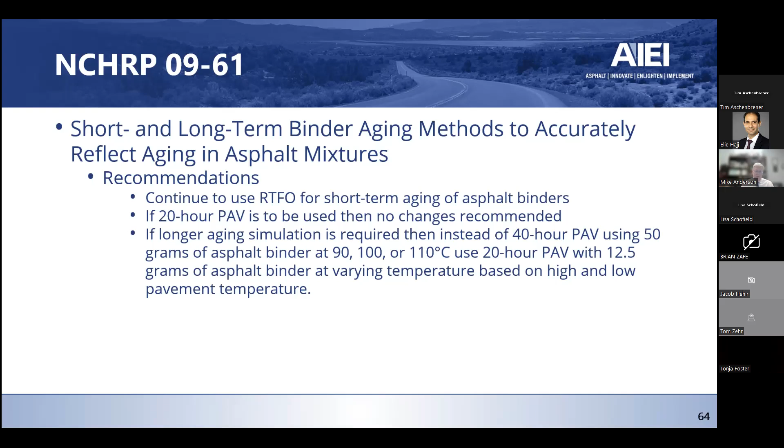And their temperature profile you see here, which is basically to say it could go as low as 85, which right now we're at 90 as a low end. It could go as high as 115, and right now we're at 110 on the high end. But for the most part, you see these are weather stations where that would be appropriate. You're way out on the edges here, so maybe one or two places, and that's all. Your 52/28s, 58/28s, 64/28s, 58/22s, those are the predominant ones. Those are all going to be at 100 degrees C.

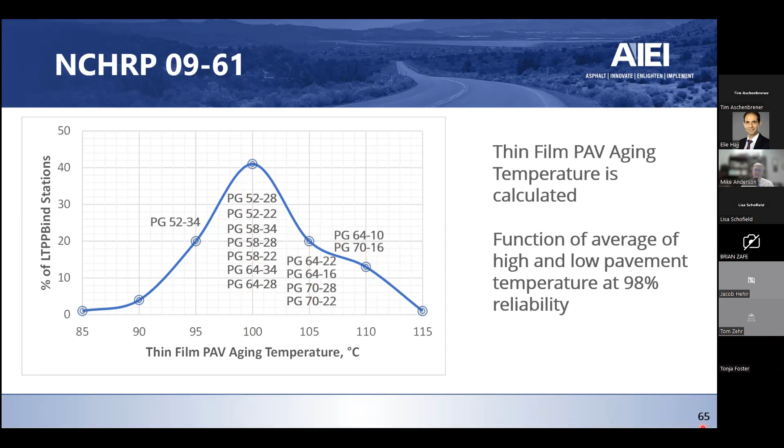64/22, this is a little bit of change for people. It would be a 105. 52/34 would be a 95. 64/10, 70 minus 16 would be 110. So those temperatures do change a little bit, and that's in conjunction with that thinner film.

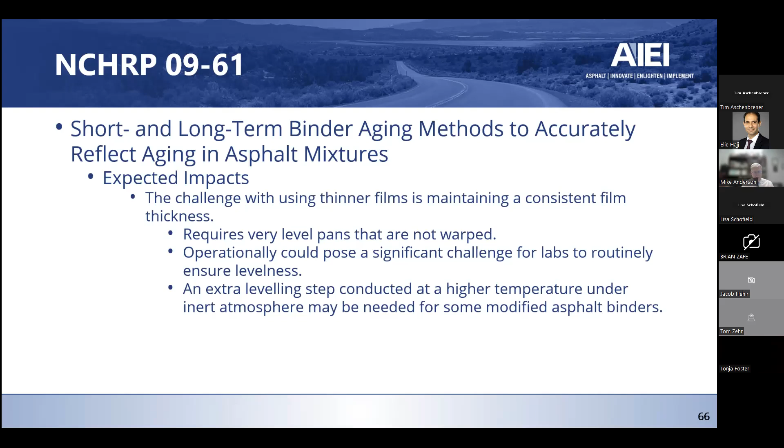One of the things they noted is that there's a lot of challenge to using a thin film and maintaining consistent film thickness. You've got to have very level pans that are not warped. That might be an operational challenge. You might have to do an extra leveling step at higher temperatures, particularly for modified binders.

So what does all of this mean as far as a potential future PG specification? The 959 research says that they're recommending Glover-Rowe parameter instead of G star times sine delta. Their research recommended keeping the same criterion, which is 5,000 kilopascals at 10 radians a second. It's just a different parameter that you calculate.

Operationally, there's really no change for the technician. You might have to have a different report out, so you might need a different script on your DSR. But operationally, there's no change. You're still doing G-star, still doing AASHTO T315, so it's the same procedure, still at 10 radians per second. So no real changes there.

The intermediate temperatures could change if that's adopted. So you'll have to be aware of that, and that could have an effect as well.

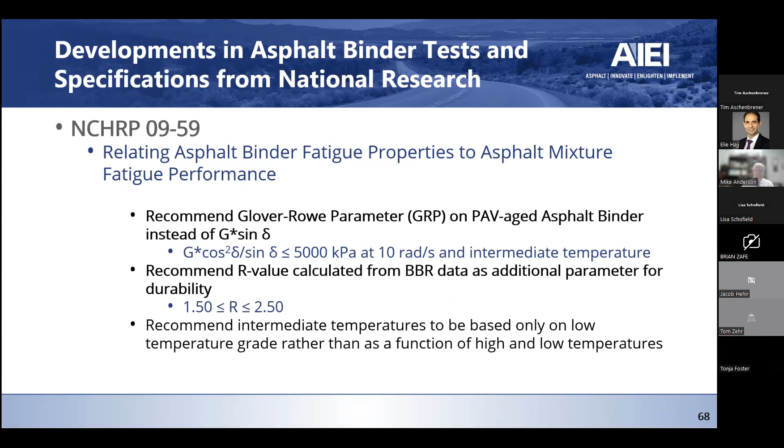They did recommend this R value calculated from BBR data as an additional parameter for durability, and they gave some ranges there. Again, this is based on PAV20. They did some limited testing at PAV40 and had some recommendations for there as well, and the changes with the intermediate temperature. As far as 960 goes, they're recommending using delta TC as an added parameter for durability and relaxation.

Anything above -2, this is again 20-hour PAV, passes. If it's below -6, it fails. If it's in between the two, then you're really going into something very similar to what is in footnote G in AASHTO M320 table 1, which basically is about using the direct tension test and failure strain, which we don't really use. At least most of us don't use it.

It might be used a little bit, but basically it's a qualifier, which says footnote G says if you're between 300 and 600 megapascals on your stiffness, you can run failure strain, and if you have above 1% failure strain in the direct tension test, you can qualify that binder at that low temperature grade.

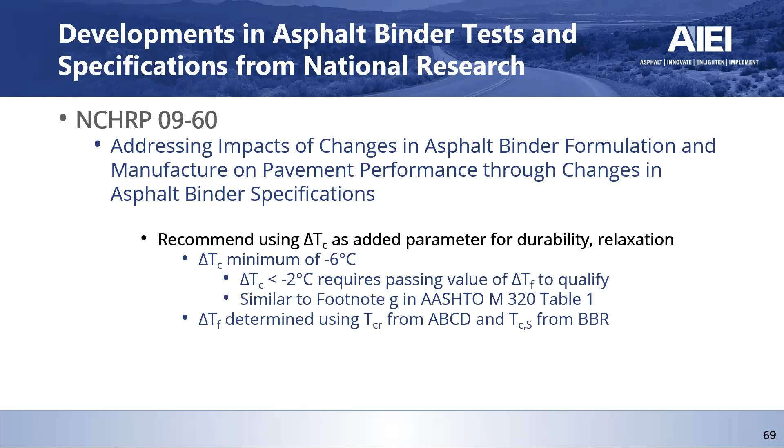This is kind of doing the same thing. It's saying if you're between -2 and -6 on delta TC, you can qualify that binder by using ABCD and calculating that delta TF. As far as aging procedures, there's really no change in the RTFO.

Again, there is an elevation change that's in the new version of T240 to pay attention to. There's no change in PAV procedure if you're keeping the same one that you've worked with. Just know that if you're going to try and simulate 40-hour PAV, you could use a thinner film. You keep the same operating parameters, but achieving that thinner film could be a challenge. You might use different temperatures as well.

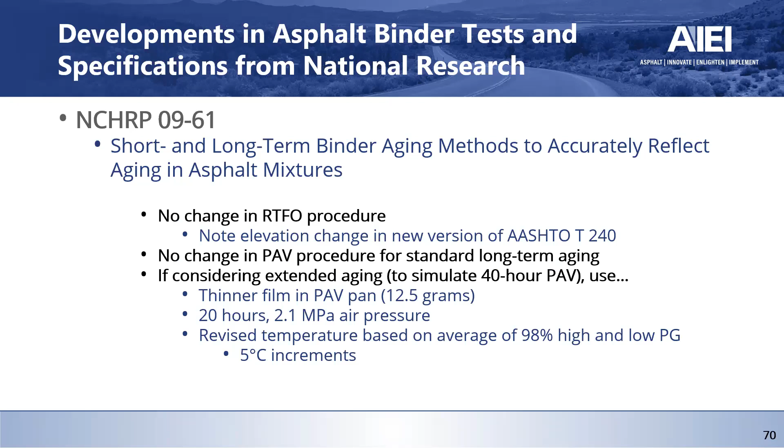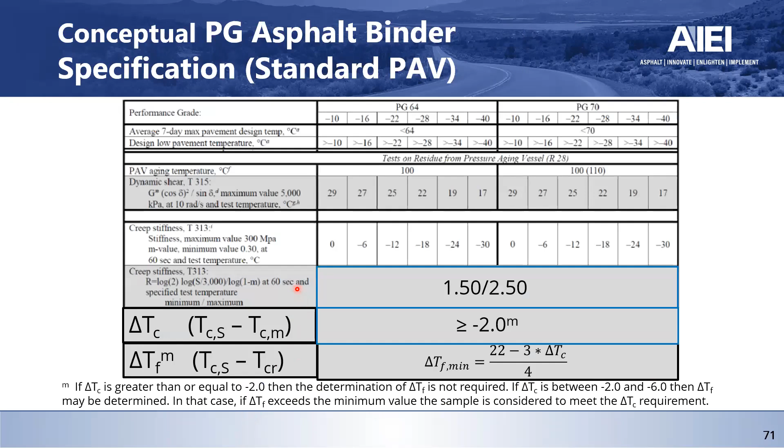So your future specification, this is just looking at a 20-hour PAV. I don't think you're going to necessarily need to have both the R value and delta TC, or if you wanted to replace, even add in that phase angle at G star of some level, say 10 megapascals. These three parameters, R value, delta TC, and phase angle, all tell you about the same thing.

They tell you about the relaxation properties of the asphalt binder. So it's not necessary to have three of them, or even two of them perhaps, but right now I just put in what 959 is recommending, what 960 is recommending. I don't think these will conflict with each other for the most part. And then what this ABCD qualifier would be here, and that's just a parameter. I just defined what that line was, and that's what that delta TF min is looking at.